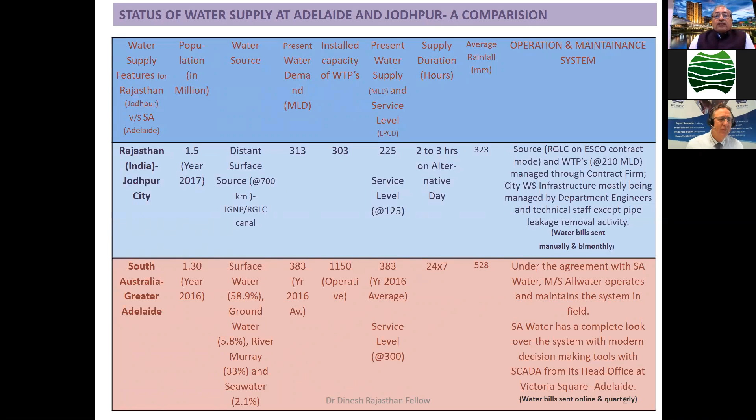The water tariff rates are also very cheap in our state. Here, they are charging very good rates for the water supplies, but they are having very good pressure supply. About 30-meter pressure supply is there at every household location. The design water demand is also more than 300.

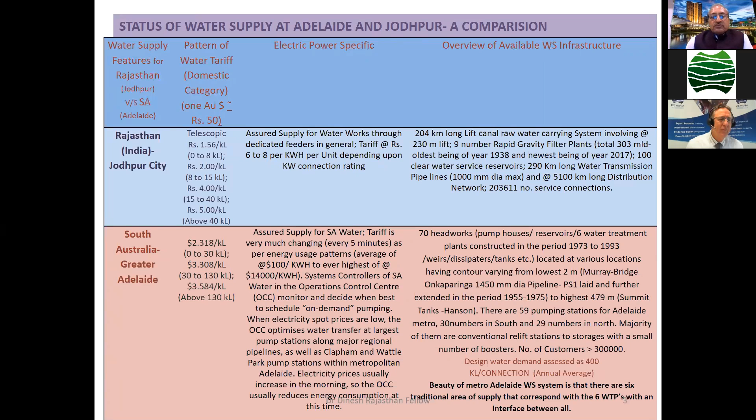They are having all types of data even up to consumer end. They are managing the entire water supply with this telemetry system, automatic SCADA system. All things are linked with the river basin - linkages for river basin water levels, raw water pumping stations, water treatment plants, reservoirs, pumping stations, and all peripheral pumping stations up to the head office at SA Water.

Every report regarding any water consumption readings, the water billing, consumption pattern, any interruptions in water supply, system calendar - all are available on the system here. Therefore, the water supply of Adelaide is very good and very distinctly managed. A very good management system is there.

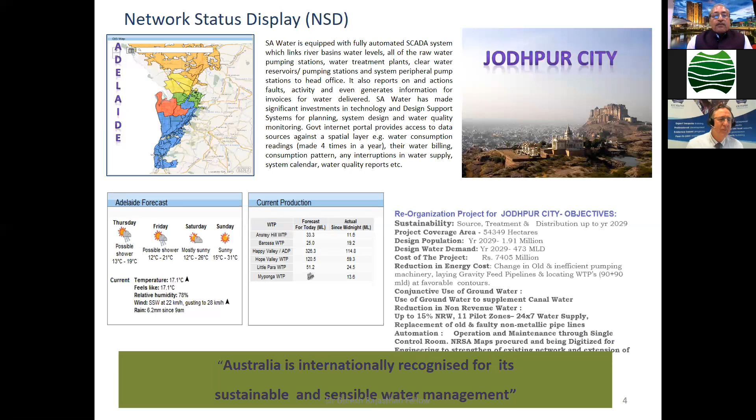Compared to here, the Adelaide water supply management system has many very recent softwares, and every software is being used very efficiently in the respective fields. The GIS platform for data collection, inspection, and asset management is very decent. SA Water maintains a metropolitan regional telemetry system for surveillance and monitoring 24 hours for the performance.

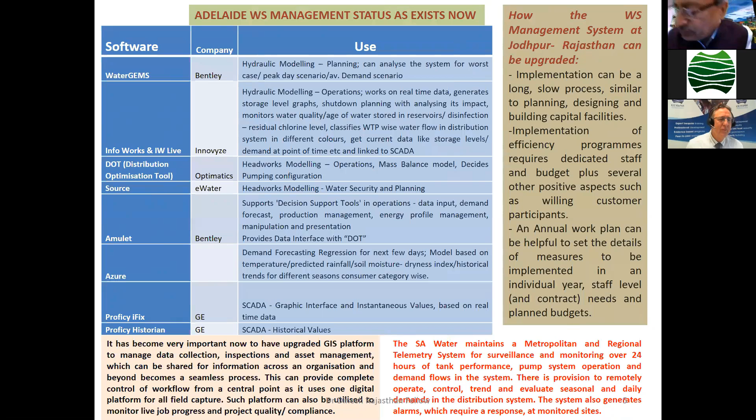All these systems can be introduced in our state also, and that can help in a greater way. Thank you. Thank you very much, Dinesh, that was excellent - a lot of material to get through in a hurry.

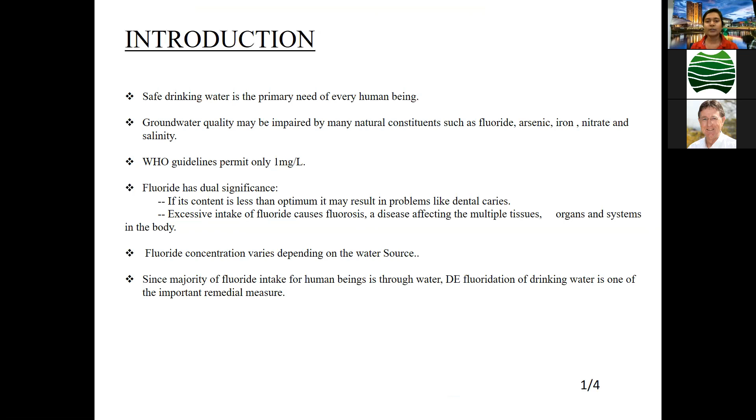One of the processes of removing fluoride from drinking water is adsorption. Adsorption is the property of a solid substance to attract and hold particles on its surface.

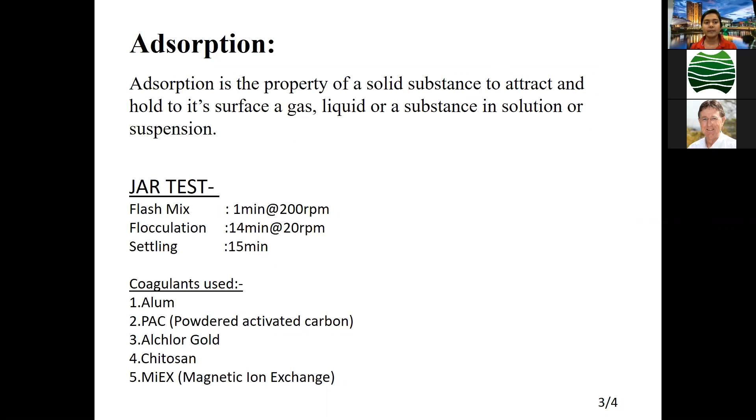So I performed a jar test for removal of fluoride. I used 5 coagulants, all natural coagulants: alum, PAC, Alchlor Gold, chitosan and MiEX. The procedure of the jar test was 1 minute flash mix at 200 rpm, then flocculation for 14 minutes at 20 rpm, and settling for 15 minutes.

After that, I found the results of all these 5 coagulants, and only alum was able to remove fluoride, unlike the other four. The reason behind this might be that the availability of free aluminum in alum was much higher compared to PAC, Alchlor Gold, chitosan and MiEX. So fluoride was more removed by alum than by any of the other coagulants. Thank you.

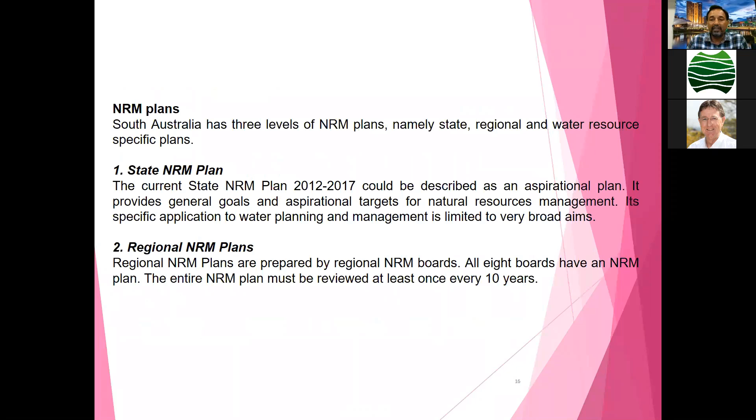One is the state NRM plan, which is an aspirational plan having general goals. The second is the regional NRM plan; there are 8 NRM boards in South Australia, and each board has its own NRM plan. The third plan is the water allocation plan.

Each NRM board has to write their own NRM plan and water allocation plan. The water allocation plan is to be reviewed once every 10 years. DEWNR helps them in writing the water allocation plan. A key purpose behind developing a water allocation plan is to manage a prescribed water resource via a system of property rights through the use of water licenses.

A water license is required to take water from a prescribed water resource and gives the water user a right to access water from that resource. These water licenses can be tradable and transferred. Water trading enables licensees to manage their individual enterprises, either by buying water to meet their water use requirements, or selling or leasing water they are not going to use. A water license can be transferred either permanently or temporarily.

DEWNR is not involved in setting prices for water. Prices are determined in the market by the value placed on water by buyers and sellers. Thank you. That was great, thank you very much, Jitendra.

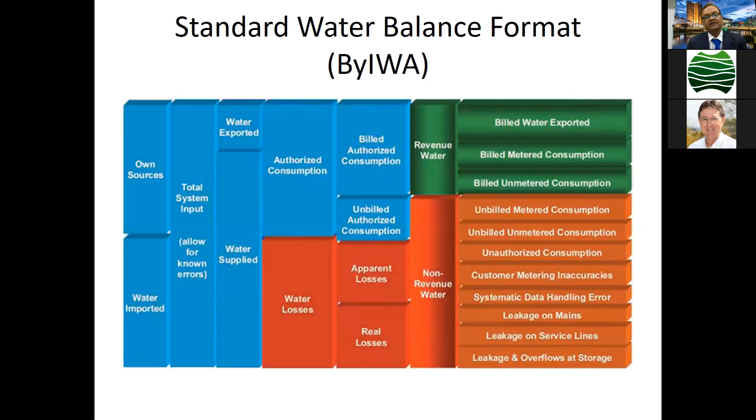We can find the answer to questions like where is water lost, how is water lost, and how much water is lost. For these questions, and for strategies and prioritizing investments, this analysis is very much essential.

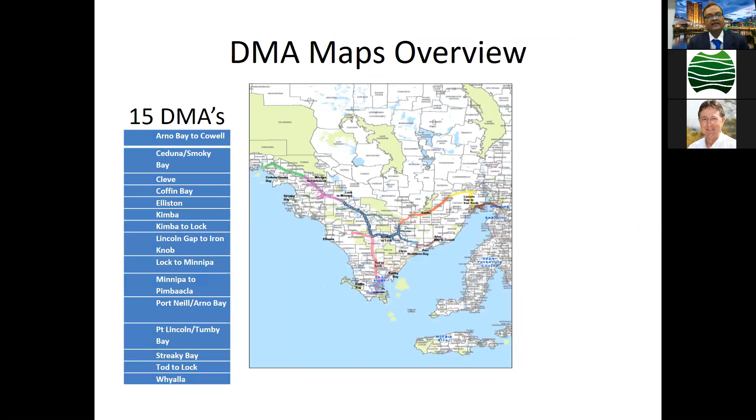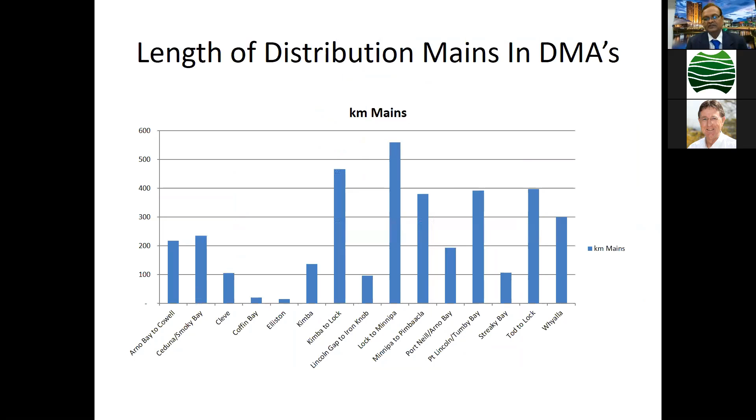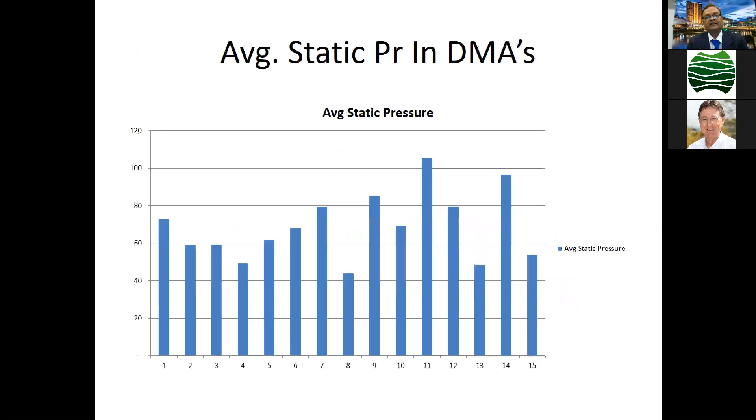In Eyre Peninsula, the east side is Gulf of Spencer, west side is Great Australian Bight, and north is Gawler Range. 15 DMAs are formed in this area. Distribution mains total nearly 3,139 kilometers, with 29,842 connections. Average static pressure in this area is nearly 42 to 102 meters, which is much higher than recommended by the IWA.

That's the problem, and to sort it out, it is essential that utilities provide water at high pressure but maintain service level everywhere, all the time. More water leaks occur due to high pressure. High pressure causes more bursts, so we need reduced pressure while still providing quality service.

To control the high pressure, it is recommended that dynamic boundary valves should be used in this system. This is facilitated by replacing certain closed boundary valves.

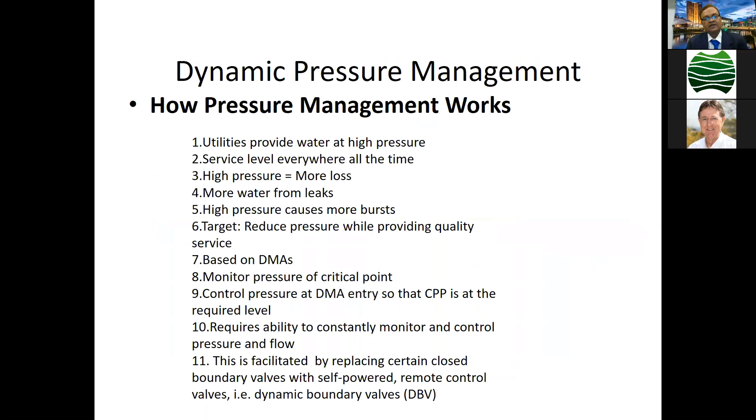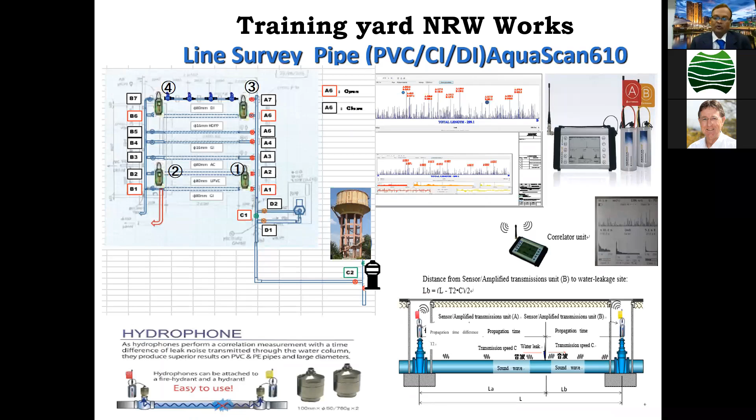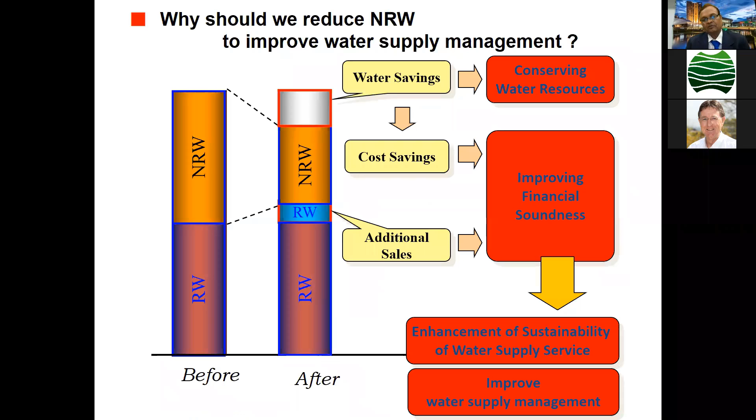This is why we should reduce NRW. If we reduce non-revenue water directly, our water savings will convert into cost savings, and it will enhance the sustainability of water supply service and improve water supply management.

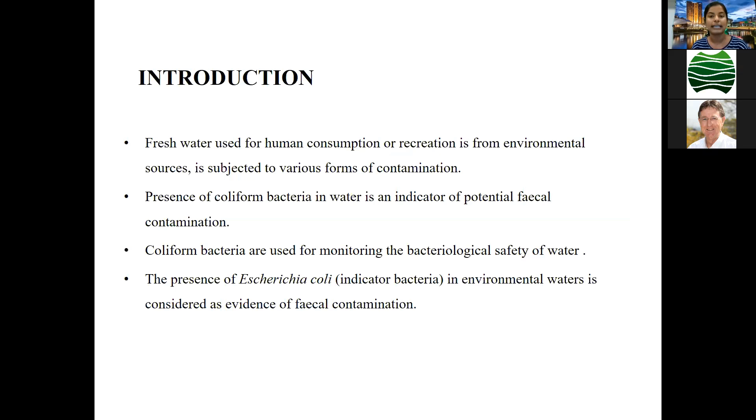So what is the need of the hour today? We need rapid, highly specific, and sensitive assays for detecting these bacterial indicators in water samples for easy water monitoring, so that public health is not at risk.

During my fellowship here at SA Water, I had an opportunity to get introduced to a PCR assay, which is highly specific for detecting E. coli, a fecal indicator in environmental waters.

A PCR is a polymerase chain reaction. As the name suggests, it's a chain of events taking place. We need a specific set of primers to begin this assay. What we need is the genetic material of an organism, which we call the DNA.

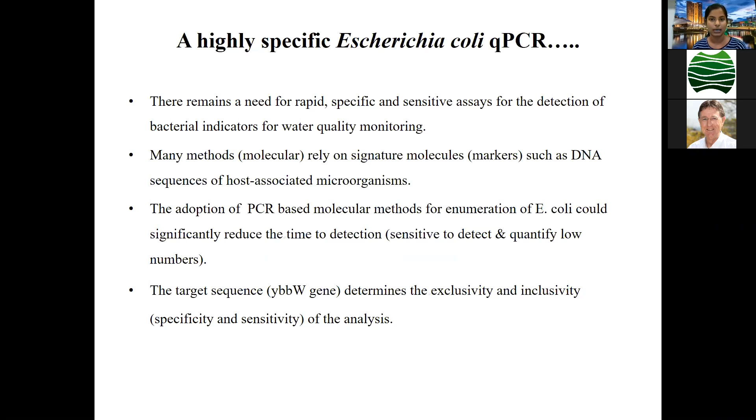In a PCR assay, we focus on amplifying a specific portion of the DNA, and a number of copies of this target sequence are produced. In this experiment, the target sequence we amplified was the ybbW gene from E. coli. A recent study found that this gene is exclusive to E. coli.

We have a specific set of primers, as you can see, which we use to amplify this particular gene. A number of copies of this gene are produced in case you have E. coli contamination in your waters.

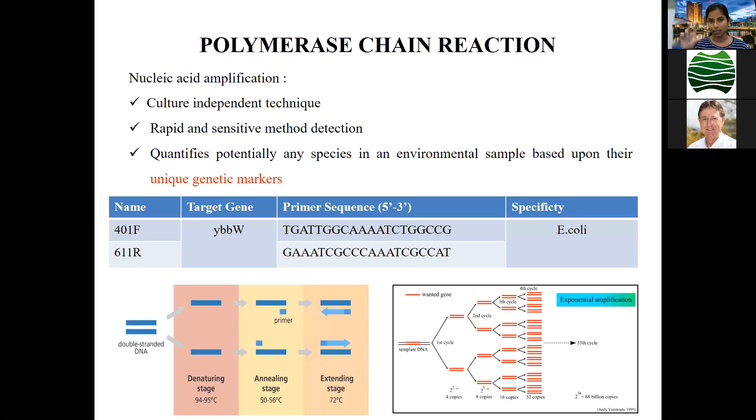The more copies we have, the higher the fluorescence increases, and we can quantify the DNA using a standard curve. This helps detect the amount of E. coli present in your sample. Thank you.

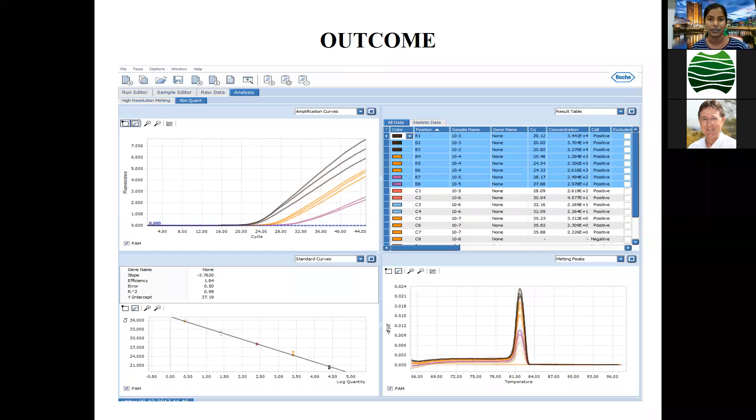Well, you can see the scope of this is so wide. It's impressive, isn't it?

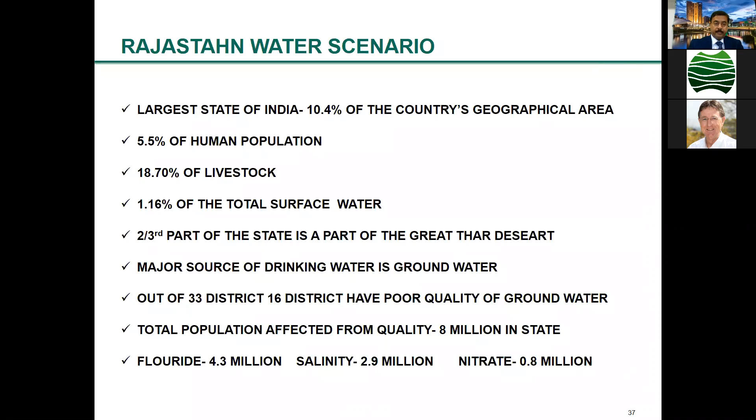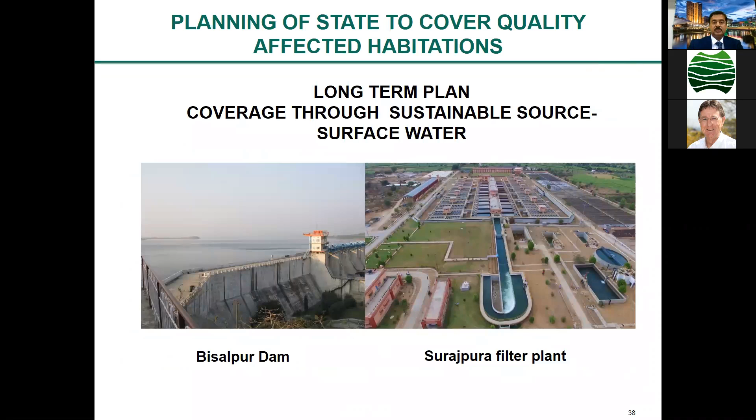So for covering these quality-affected habitations, the state has planned in two terms. First is long-term planning, where we are providing water to these habitations through sustainable surface sources. In short term, we are providing water through community water purification plants.

Most of them are based on reverse osmosis technology. The problem with reverse osmosis technology is the reject water, because around 60% of water is purified water, and the rest 40% is released as reject water, which contains high contamination of fluoride, nitrate, and salinity.

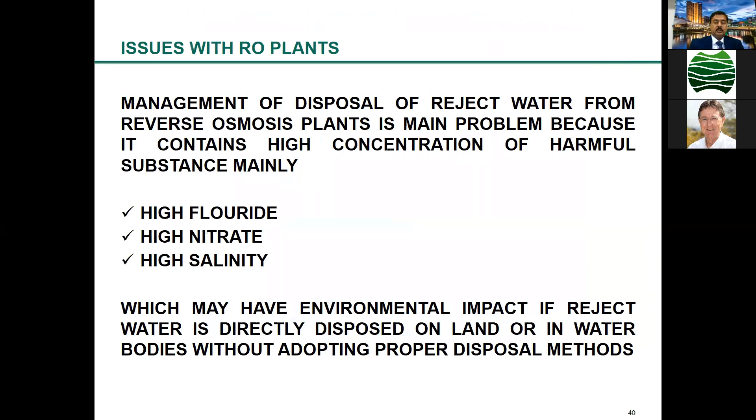If you discharge this water directly into the ground or water bodies, it will create environmental problems, it may affect the groundwater and the soil. So I discussed this issue here in SA Water with the people, because they have got very big plants working. Most of these are ocean-based plants, so they are just putting the reject water into the ocean.

After discussion, we came to the conclusion that for low-cost management of this RO reject water, we have to opt for three strategies: reduce, reuse, and recycle. Reduce means increasing the efficiency of these plants, or bringing in technology like capacitive deionization, so that we can recover more water and reduce the reject water.

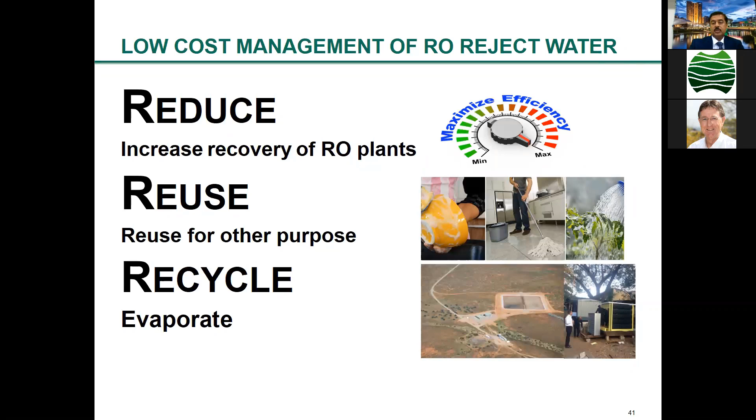Reuse means reusing the reject water for other purposes, such as washing, dishwashing, and agriculture, but there is a limitation to this. Third is recycle: if it cannot be reduced or reused and the TDS of the water is very high, then you have to evaporate it.

Thank you, Niril. Stunning, absolutely stunning figures of Rajasthan's population and water resource issues there. That helped give the big picture. Over to you, Pankaj, Executive Engineer, Water Resources Department, Rajasthan.

Thank you. Hello everybody, my name is Pankaj Munjal, working as Executive Engineer in the Water Resource Department, Rajasthan. Presently I am placed with the Surface Water Team in DEWNR, the Department of Environment, Water and Natural Resources, Adelaide, South Australia, under a fellowship program facilitated by ICE WaRM South Australia.

I have selected my work area as identification of trend or step change in rainfall pattern of Rajasthan, by analysis of rainfall data at individual station level, basin-wise. In short, I want to discuss why to undertake an analysis of change.

As an executive engineer in the Water Resource Department, we all know water resource systems have been designed and operated based on the assumption of stationary hydrology. If this assumption is incorrect, then existing procedures for designing dams and reservoirs will have to be revised. Studies of change are also important because of our need to understand the impact man is having on the natural world. A change may occur abruptly, called a step change, or gradually, called a trend. Changes can be seen in mean values or within-year distribution.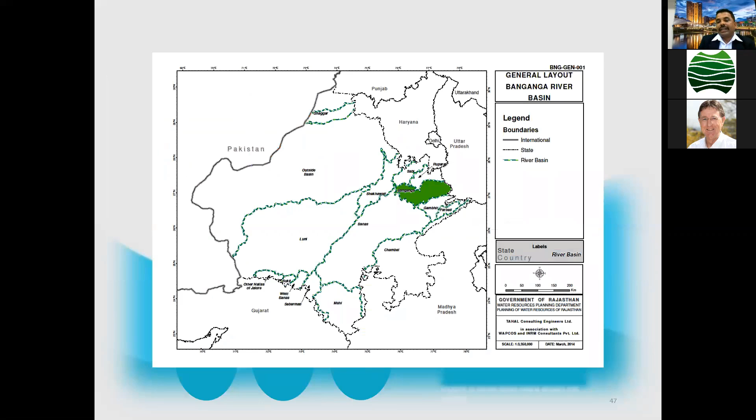With the DEWNR team, I have fixed a methodology for the work: selection of one basin as a pilot project, the Banganga River Basin.

Identification of rainfall stations comprising total daily rainfall data of more than 45 years. We have selected 13 stations where data is available with more than 45 years of data.

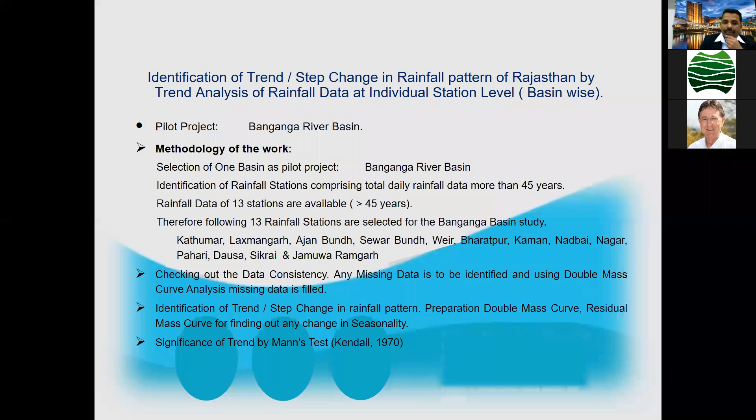The next step is checking the data consistency. Another step is identification of trend and step change in rainfall pattern. And last, significance of trend by the Mann-Kendall test.

Analysis work of the Banganga Basin is under progress and will be completed within 3 to 4 days. Based on the results of this analysis, I will further carry out the same analysis of rainfall data for all basins of Rajasthan state.

The outcome of the study will enable identification of the year of step change in rainfall pattern. With the help of this study, I will further recommend the rational use of rainfall data to assess water availability in river basins. Thank you, thank you very much.